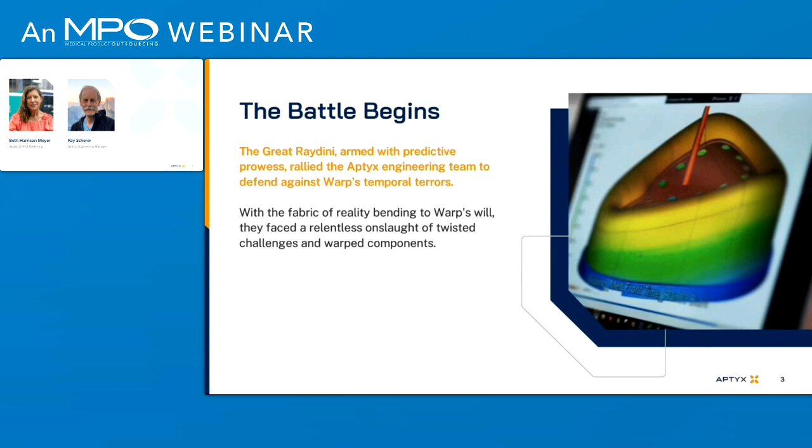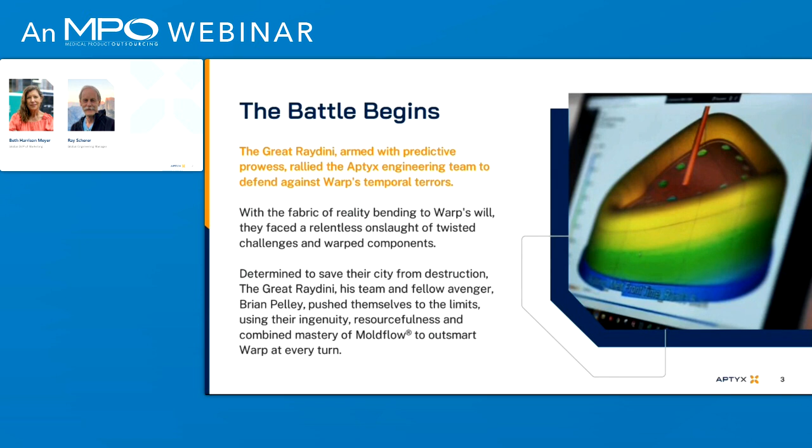In the bustling city of MedTechtropolis, where speed, quality, and life-saving innovation reigns, an Aptyx engineer named Ray Scherer discovered his extraordinary gift for predictive engineering. With an uncanny ability to foresee and course-correct using design for manufacturing, giving him an ability to dodge delays and evade catastrophic costs, he became known as the Great Raydini. As medical device and manufacturers faced surging demand for their groundbreaking products, a sinister force loomed on the horizon. Warp, a rogue villain with the power to manipulate time and space itself, emerged from the shadows. Driven by a thirst for chaos and destruction, Warp sought to disrupt manufacturing operations and plunge profits into darkness. The Great Raydini, armed with predictive prowess, rallied the Aptyx engineering team to defend against Warp's temporal terrors. With the fabric of reality bending to Warp's will, they faced a relentless onslaught of twisted challenges and warped components. Determined to save their city from destruction, the Great Raydini, his team, and fellow Avenger Brian Pelley pushed themselves to the limits, using their ingenuity, resourcefulness, and combined mastery of Moldflow to outsmart Warp at every turn. After a grueling battle, the Great Raydini, Brian, and their team emerged victorious, banishing Warp back to the depths of the time-space continuum. With MedTechtropolis safe once more, the Great Raydini's legend grew even stronger, inspiring engineers everywhere to harness the power of technology for good.

So I hope you enjoyed that video. We love what we do, and we like to have some fun with it. So what we're going to cover today is I will do a brief intro into Aptyx and then turn it over to Ray for the heart of the presentation, or rather the Great Raydini. He will cover tolerance planning and the impact of shrink and shape control and how to manipulate warp. And then, as Sean said, Q&A at the end.

So while Aptyx is a new or newish name, our experience is not new. As Sean mentioned, we bring together the aptitude and excellence of more than a dozen companies with a 70-year track record in complex design and manufacturing. We do this across a global network of more than 10 locations with a broad range of capabilities. But what makes Aptyx Aptyx is our team of experts, and our make-it-happen mindset. We like to say that engineering is the heartbeat of the company. Our team loves nothing more than diving in, partnering with customers, and solving complex challenges. And you'll see some of that today.

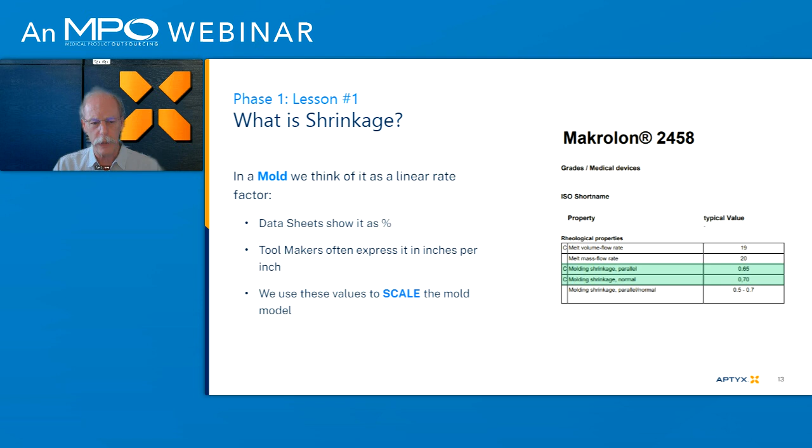Tool makers often express it in inches per inch. They could say 6/1000ths per inch, but it's really a scale factor of 0.6%. And that's what they'll scale up in their mold if they're doing polycarb, for instance, to build the tool, in hopes that when it shrinks, it'll hit size. All of those values we'll use to scale the mold, as I mentioned.

So now there's another way to express shrink that I want to bring up. As I mentioned earlier, if you're familiar with Moldflow, we use it a lot. Moldflow expresses shrink a little differently, and this is a key to what we'll talk about today. Moldflow expresses volumetric shrinkage, and it's basically the difference between melt temperature volume and solidified volume.

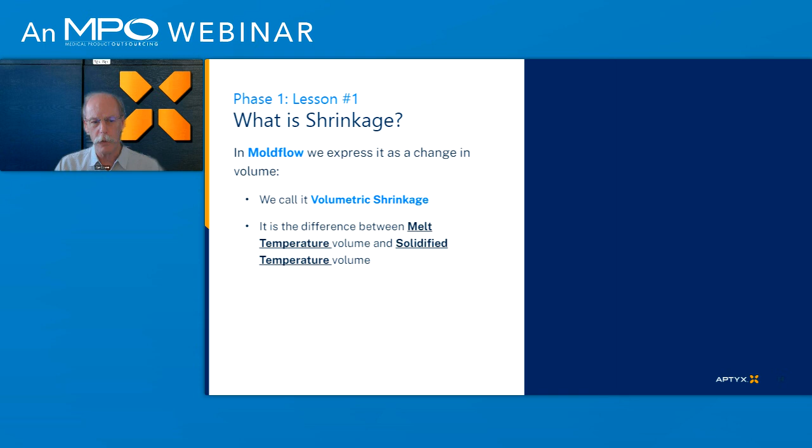So if you think about it a minute, when you heat up a plastic, it expands, density drops. When it cools down, it contracts and becomes more dense. That delta between the melt temperature and the solidified volume is really what Moldflow calls volumetric shrinkage. And here's a little pictorial example on the panel on the right. You can see the little white cube represents the melt volume where it expands. And then as it cools down, the little purple box is the solidified volume afterwards. And that percentage change in that overall volume is what Moldflow will report.

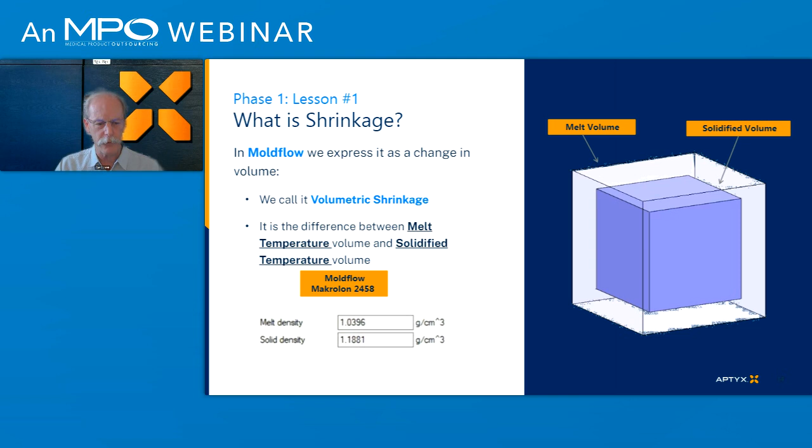If you look down on the left side, down the lower pane there where I have the Moldflow Makrolon 2458, you'll see the densities. This is out of Moldflow. The normal solid density for polycarb is 1.18, but when you heat it up, you lose the density, 1.03. And there lie some of the challenges that we have in plastics. Important note to make here is that volumetric shrinkage is not the same as linear shrinkage, although they're proportionally related.

So if you look over here again on the right-hand panel, this is a clipping out of Moldflow for some shrink study work that was done with Makrolon 2458, a polycarbonate. And you can see in green where I've highlighted that row, it shows a couple of different rates, the parallel shrinkage and the perpendicular shrinkage, which is cross flow. And again, we'll talk about that a little bit more later in the presentation.

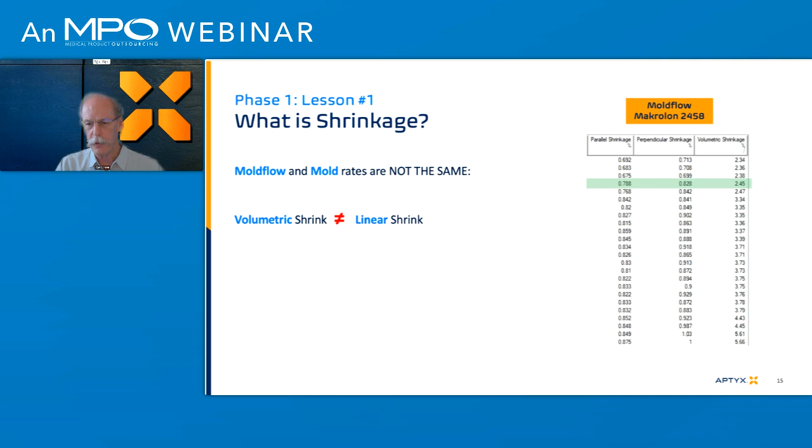But you can see 0.7%, 0.8%. But then you look on the far right, we got volumetric shrinkage at 2.45%. That's how much volume we would reduce. So while they're related, they are different numbers. It's important to point out.

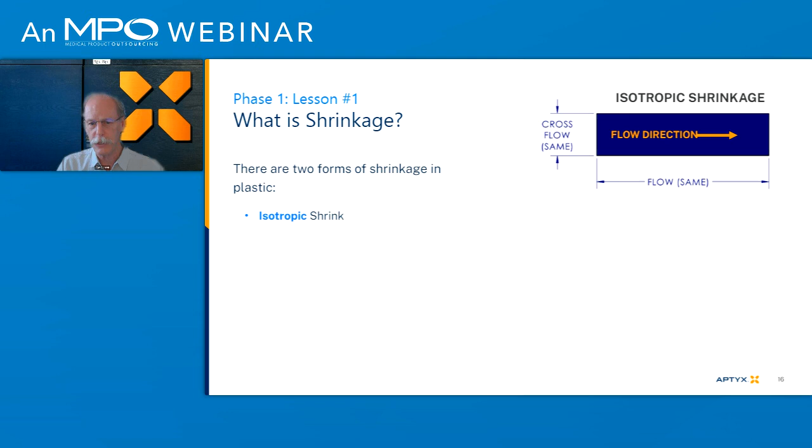There's a couple of forms of shrinkage that we need to address. One of them is isotropic shrink, and many of you might be familiar with that, but really it's just a fancy way of saying that the shrink in the flow direction and the cross flow direction is very uniform, virtually the same, and we'll call that isotropic. In contrast, there's anisotropic, which is different in the two different directions.

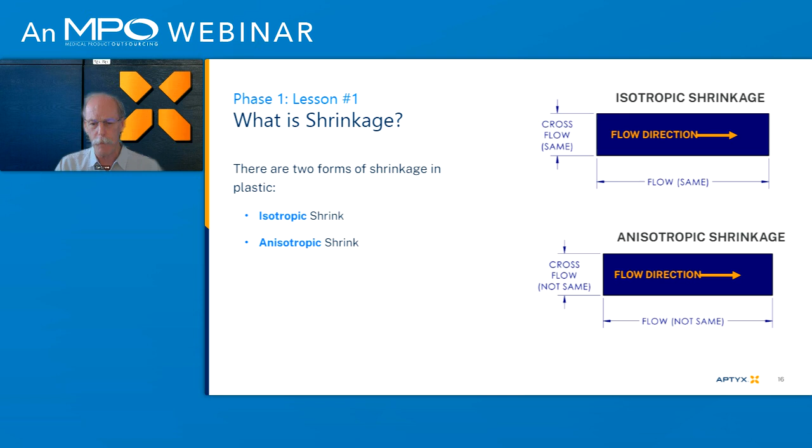So in the bottom image I just put up there, you'll see the flow direction. But in that flow direction, the shrink rate will not be the same as the shrink rate across the flow. And therein lie issues that will create warp. And what we can do to battle that is what we'll talk about a little later in the presentation.

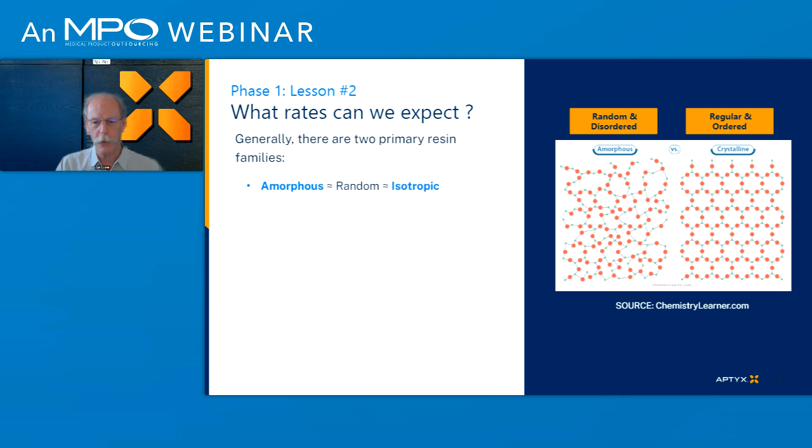So another important thing for everybody to keep in mind when they're picking resins is that there's two primary families, and many of you might be aware of this already. There's the amorphous family of resins, and in their molecular alignment, they're very random in nature, random and disordered, you can kind of see the panel on the right, and they're very isotropic. So because it's so random, you get a fairly uniform shrink with amorphous resins in both the flow and the cross flow.

In contrast, you got semi-crystalline resins, which are very regular and ordered inside the part. And that order causes deltas in shrink between cross flow and flow, which we'll call anisotropic. So good thing to remember, because as you get into designing parts, depending on what you're trying to achieve, one of these families might be better than the other.

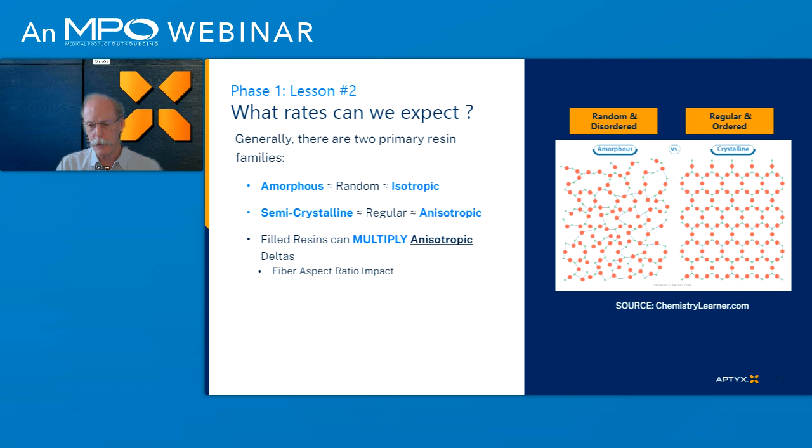A further complication, which we won't get into today, is filled resins. So the moment you introduce fiber into these resins, the anisotropic behavior gets worse. And it really has to do with that fiber aspect ratio, how long the fiber is compared to its diameter. I like to think of it this way. This is a picture in my head.

You can picture it as logs in a river. The river is flowing just like plastic flows. Those logs, which represent glass fibers in this particular case, could stack up on each other. So end to end, they can get very close together. But across them, there's plastic in between, or water, as we see here.

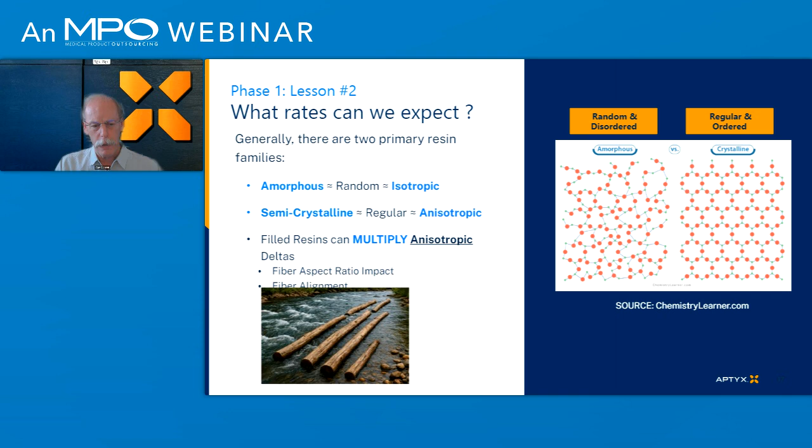So as that polymer begins to cool, the shrink across the logs actually gets higher than the shrink along the length, because the logs are holding it back from shrinking. And so you end up with a much lower shrink rate in the flow direction, and then a much higher one in the cross flow direction. But again, today we'll focus more on unfilled resins.

So a good question is what kind of rates can we expect? Generally speaking, amorphous resins will shrink about 0.4 to 0.8%, pretty common. In the chart on the right there, I just threw out some common amorphous resins. You got polycarb, ABS, polystyrene. You got the Ultems, the PMMA, the acrylics, PS, the polysulfones. Those are all amorphous resins, and they all tend to fall in this 0.4 to 0.8, or if you're talking to a tool maker, 4 to 8 thousandths per inch.

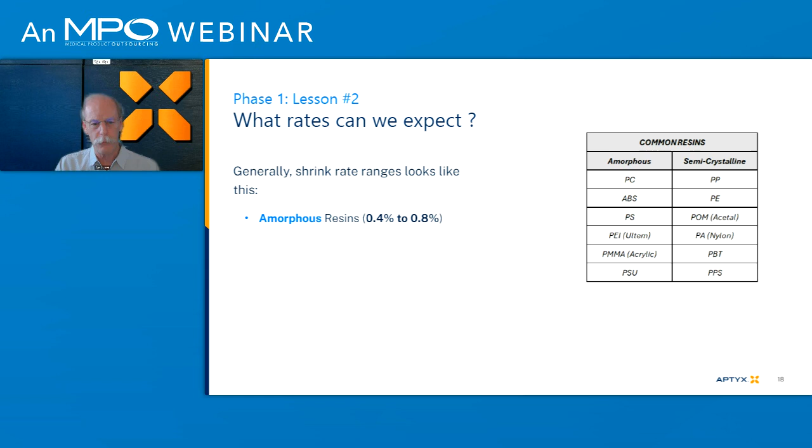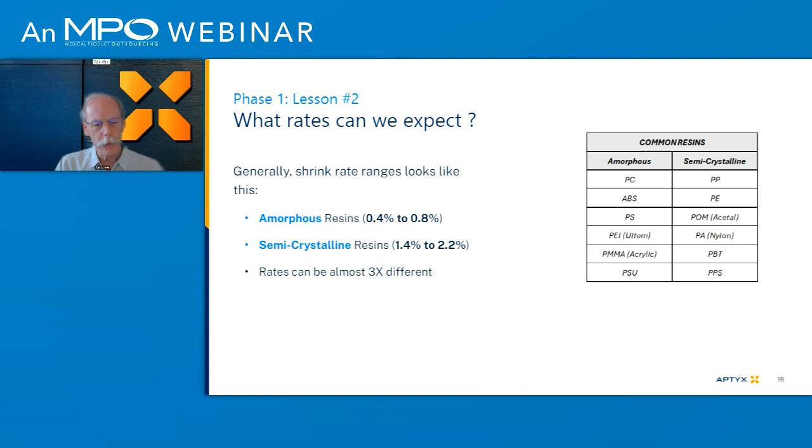In contrast, when you go to the semi-crystalline resins, it cranks it up quite a bit. You'll commonly see 1.4 to 2.2%. Those are resins that you see over the chart. Typical ones are polypro, polyethylene, acetals, your nylons, PBT, PPS. Those are all semi-crystalline resins that hover around these higher shrink rates. So if you notice, these rates can be up to 3 times different, which is important for the conversation today.

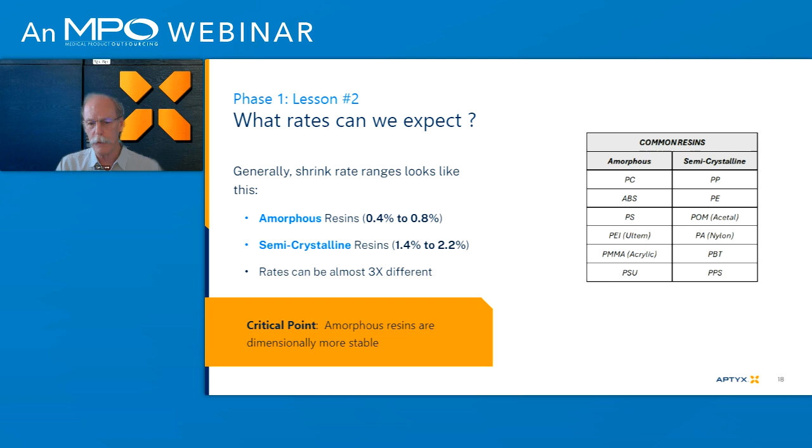So the take-home point is amorphous resins are dimensionally more stable, something to keep in mind. There's other reasons for picking different resins, chemical resistance and so on, but generally from a dimensional standpoint, amorphous resins are going to deliver a more dimensionally sound part. Shrink can vary for many reasons. This is what we want to talk about today.

Part thickness, and I'm sure many of you are aware of that. Part thickness, as it increases, so if you have a 60 thou wall versus a 150 thou wall, that wall thickness will have influence on shrink. As it gets thicker, you will get more shrink out of that wall. Pressure also has an effect. As pressure goes up, you can pack out the density harder, and you're going to shrink less.

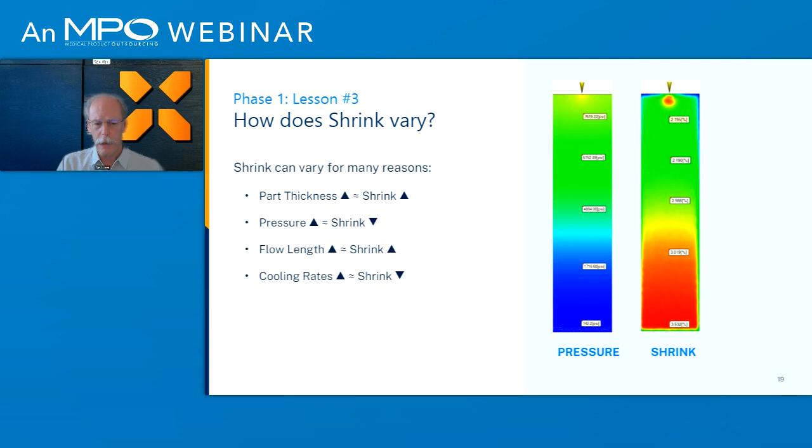And here's another really important one. Cooling rates can affect shrink. So the faster you can cool an area, the less shrink you might see out of that particular area. And we'll talk about that. So the important take-home point is volumetric shrinkage varies throughout a part, and that's on every part everywhere. Even though you design with a uniform wall, you can end up with variable shrink throughout the part for these other reasons: thickness, pressure, flow length.

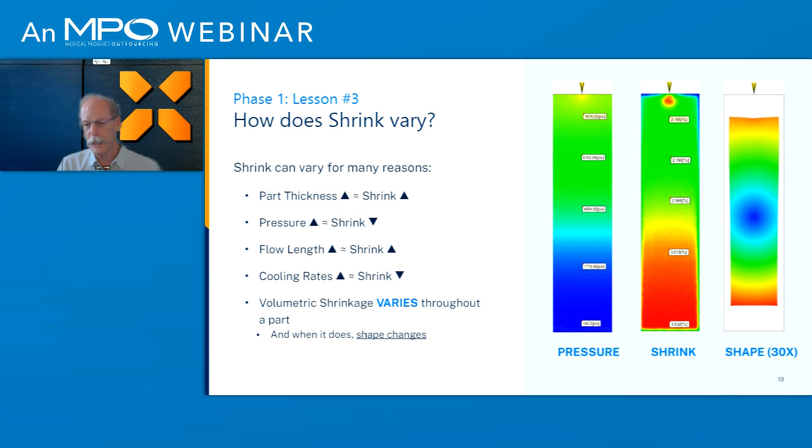So when they do vary, shape will vary. So this is where the struggle becomes. You know, you got your nice CAD file, you want your part to look like the CAD file, but you pull it out of the mold and now it doesn't. So here's a little magnified shrink or warp picture of these two plaques on the left. This is multiplied 30 times, but you can see the effects. It's sort of trapezoidal in nature. It gets narrower towards the bottom, it's larger towards the top. And that's the principle behind it.

So the question is, how can we manage risk? Well, there's some ways. One we've talked about, start with an appropriate resin. So if you've got very sensitive tolerances, tight tolerances that you need to drive, consider amorphous resins over semi-crystalline, good place to start. And be real about your tolerances.

It's so easy to take a model as a designer and bring it into a drawing and just tolerance everything at ±1. And the truth is, if it came out that way, your part would work just fine. The reality of it is it puts handcuffs on the manufacturing side, because you will get variation happening. So one way to accelerate speed to market as a designer is just to be real about your tolerances and really put numbers on there that make sense.

Use sound reasoning, tolerance stacks, whatever you need to arrive at your numbers, but always start large and work towards tight. Don't start with tight and work towards large. That'd be my suggestion. But whatever you end up with, there's a way for you as a designer to gauge how much risk you've put into your design. And this is what I want to show you.

So the question is how tight is too tight when I put a tolerance on a dimension? So this is a little equation I want to teach you. If you take the one-sided tolerance of a dimension, so for instance, plus or minus 10, if you take the 10 and divide it by the feature nominal, you'll get a number. And that resultant value indicates how much shrink error your tolerance can accept. And I'll explain that more.

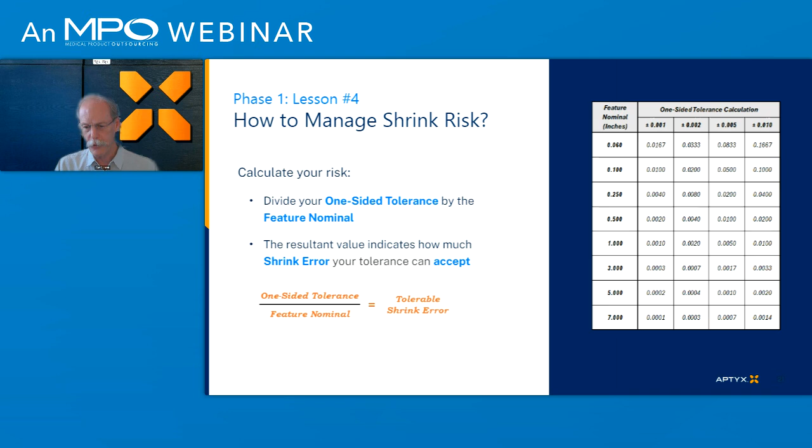In contrast, if you look at the 1-inch dimension, if I take the 1,000th divided by 1, I only got 1,000th of room. So if I miss my shrink rate by 1,000th, I'm going to be out of print on this. So let me show you how this plays out. What I typically do to get a handle on it is I'll look up the shrink rate for the resin. So let's say it's polycarbonate, and I just use a margin of about 25%. And I say, okay, I'm pretty confident that this whole part is going to be within plus or minus 25% of nominal shrink rate. So I'll do a calculation.

I'll call it my error interval. So I'll take the 6,000th shrink rate multiplied by 25%, and I'll say I'm 99% confident that that whole part is probably going to be within plus or minus 1.5 of my 6, with all that variation we talked about. So it's really saying my confidence range is a shrink rate of 4.5 to 7.5. So you say, well, what do you do with that?

Well, if you do your shrink error, the calculation I just showed you, if your value is greater than the 1.5, you're at a low risk. That means your error available to you is much higher than the shrink, and you are in the interval of error that we're expecting, and you're low risk. In contrast, if you do the calculation and your error value is lower than 1.5, you're at high risk.

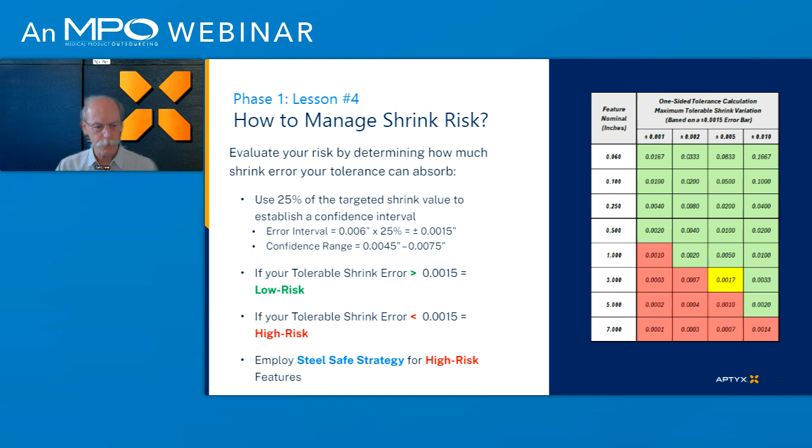Here's a little chart on the right. The red is all high risk, based on a 1.5 thousandths error bar for polycarb. You can see all the reds are below 1.5. Those are dimensions I wouldn't expect to hit out of the gate, or that could be at high risk. Typically what I'd do is look at a steel safe strategy around those. If they're in the green, you're pretty safe. If you're in the yellow, you need to look at that and make a decision. So this is a method we employ to determine what dimensions could be at risk, and then try to employ a steel safe strategy.

So what we do is I have a little tool, a spreadsheet we put together that automatically calculates like this. We'll take a customer's drawing, populate it with all the numbers, and put an error bar in up here on the upper right. We put the expected shrink rate and the error bar in there, and it flags which ones could be a concern. We take a look at those and decide how we want to approach it. It's a good little tool for you guys to use if you're a designer, to get some idea of how much risk you're putting into it via tolerance.

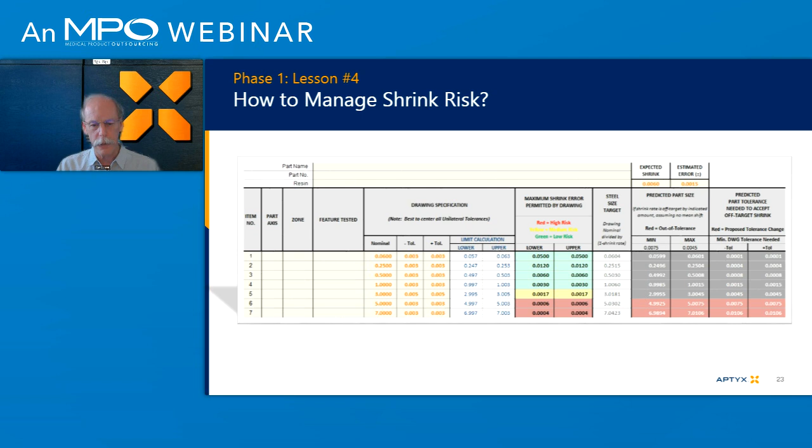A lot of times these tolerances are real, and that's where you need to be. Then you just have to work with the molder to come up with a plan to groom the mold into those tolerances.

Okay, shape control. Here's where we're going to take these principles and apply them to shape, which is really the center of the discussion today. The question is, can I use the shrink to my advantage? And the answer is absolutely. You can use it to manipulate warp. It took me a long time in my career to really realize this. I knew if I could predict it, then there was something going on there that I could possibly control. That was big for me when I finally saw this play out.

Let me go over some really basic principles that feed into this discussion. On the shrink side, we know from our earlier discussion that resin within a part does not shrink uniformly, and that's the case with all parts. So going into it, one rate's not going to solve it all.

Principle number 2 is important: if your volumetric shrinkage patterns are balanced about a neutral plane passing through the center of mass, a part will not warp. Let me explain. We talked about volumetric shrinkage varying all the way through a part. If that variation is distributed in a way that's very balanced about a plane—if you look at this image, I drew a cross section and a line through it indicating a neutral axis or neutral plane in this one axis—if you've got equivalent shrinkage on both sides, the tug of war will balance out and the part will be flat. If you don't, then the part will warp.

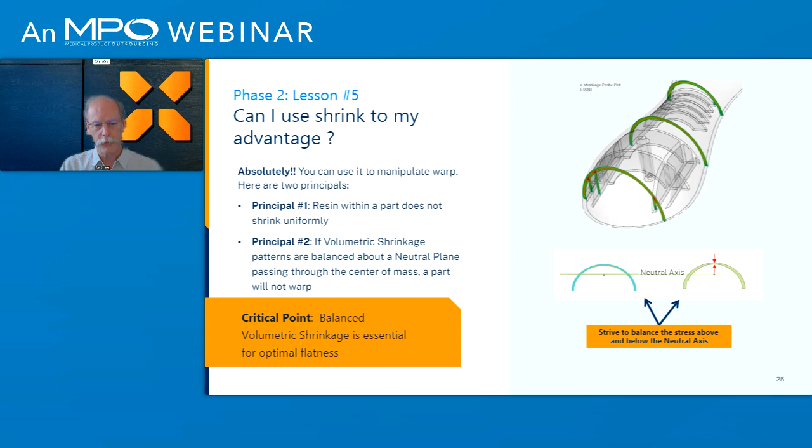The important point here is that you need to strive for balanced volumetric shrinkage if you want to achieve optimal flatness. Not every part has an optimal flatness requirement, but a lot of them do. And this is where, if you understand this principle, you can apply it and actually attack that.

This third principle I want to bring up is probably the biggest eye-opener for me. I would say if you go away today not remembering anything else I went over, if you could remember this one point, it'll be huge for you—huge. And that is: shrink decreases along edges.

So that's that distance from gate phenomena we talked about. It's that pressure drop phenomena. So we're actually shrinking a whole lot more at the end of fill than we are close to the gate.

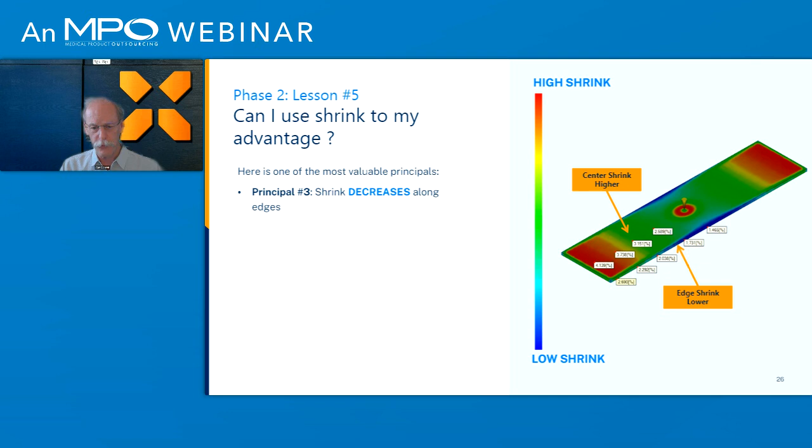And this is the part that I didn't understand for the longest time. But it's one of the major drivers of warp. So again, if you remember nothing else, remember this picture in your head that shrink decreases along edges.

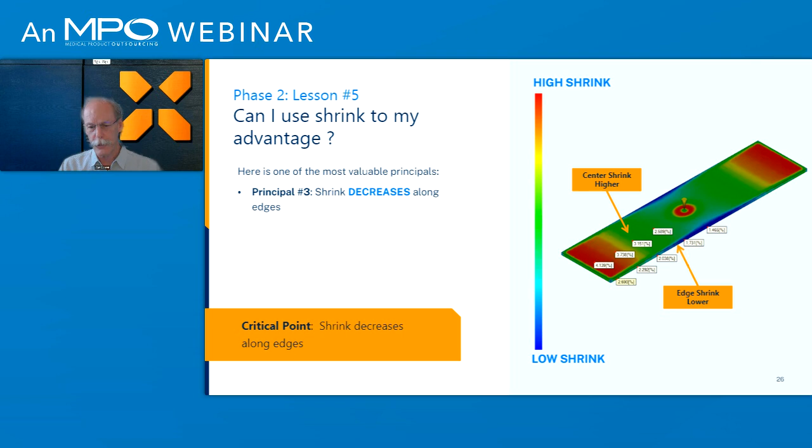So I want to show you how it played out. What we have here is volumetric shrinkage over some varying lengths here. So this is this simple little part. It's a plate with a couple of ribs. You can kind of see the picture.

First note I want to make here is that the part surfaces with higher shrinkage may be shorter than planned. So if you look at this legend again, you could see that blue is low shrink, red is high shrink. And we have anywhere we have multiple colors kind of going through this. You can see the green. So anywhere where you see a green, it's going to be a higher shrinkage. The part is going to proportionally shrink more than in the blue regions.

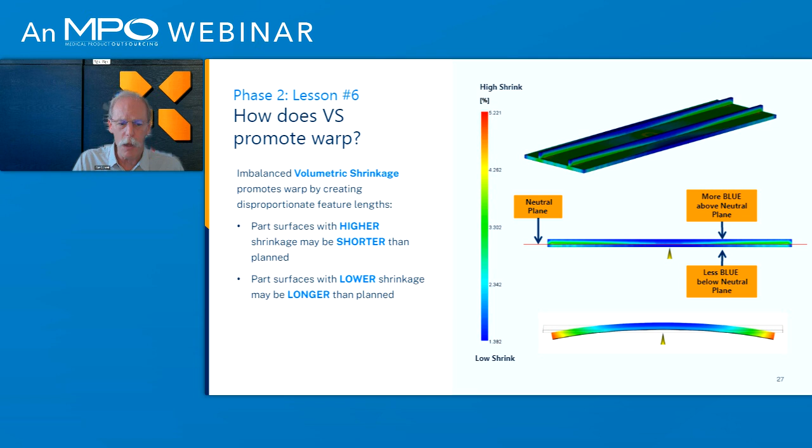So the opposite is true. The lower shrinkage occurs, it becomes longer. So anywhere you see the blue, you're going to be proportionally longer when you come out of the mold. So your mold is proportionally cut, but when that part comes out, you're going to have a long length of blue and a short length of green, and it's going to cause some distortion.

So if you look down to the middle view, I tossed in a neutral plane, that red line, you can see it. And if you look north and south of that line, you start to get a little bit of a picture. You look to the north, you see a lot of blue in those ribs, especially concentrated in the center. When you go to the south, there is some blue, but it's only along the edges. So we have this imbalance.

You can kind of see it better in the perspective view up top. You have a lot of blue up top. So something's going to happen because all that blue wants to go long, all that green wants to go short. And the picture down below, which is magnified, I think it's 10x, visually, you can see what happens. It curves. The top surface that's blue goes long, the green goes short, and that part turns into a cylinder and bends. And once I realized that, I figured, okay, now I think I got a way to attack this and maybe fix it. And that's what we want to show you here.

So again, every part contains elements of both of these shrinkages, and you can see it clearly in this particular slide.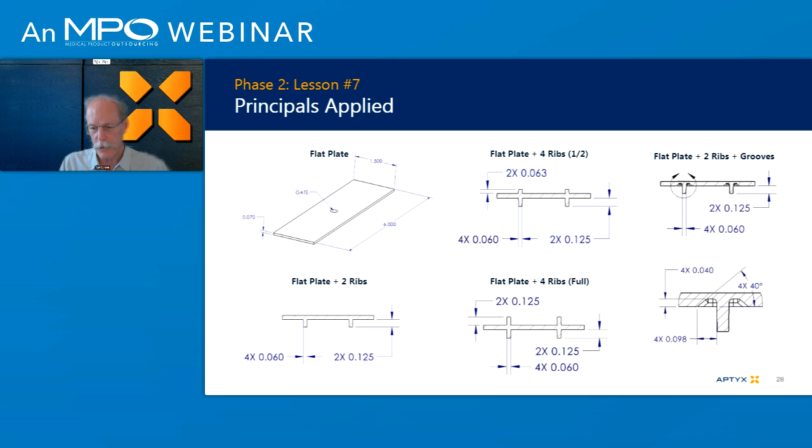So here's our flat plate, and this is a cross section of volumetric shrink. You can see in the middle, it's highly green. Around the edges, it's blue, very uniform all the way around. So if you drew a plane through the middle of that, you can see that's fairly uniform volumetric shrink, and you might expect it to be flat.

And here it is. You can see the ghost lines where the part started, it shrunk back, and we're basically very flat still, no issue.

We go to the next one, which is the one we've already seen, with the two ribs down below. But you can see through the cross section that we got a lot more blue to the south on top of those ribs, but very little to the north side. So what does that do? In this case, it creates a smiley face. It's just inverted or flipped around from the previous slide that we looked at.

So now let's make some changes. We'll take this flat plate and add those two little short height ribs to the north. They're half the height of the ones on the underside. If you look at the cross section, you'll see there's still more blue to the south than there is to the top, but there's still more to the top than there was before. So maybe this should help.

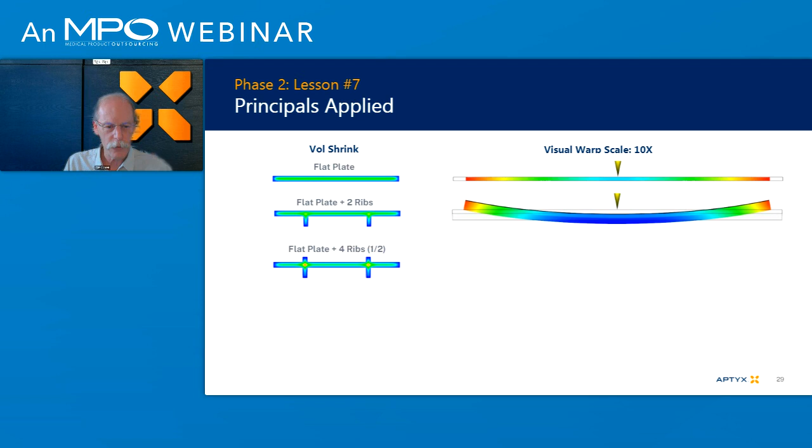Let's find out. And sure enough, it does. If you look at the shape, it's still smiling at us, but it's not quite as much as it was previously. So the question is, what if we make those ribs full height, so we're completely symmetrical?

If you look at the cross section again, you'll see the blues all pretty much match up symmetrically. And what might we expect? It'll stay flat. So it'll shrink, but it'll stay nice and flat.

Lastly, the groove idea. So we threw some grooves in. We still have all the blue that we'll have down at the bottom of the rib. But now we've introduced a couple of bands of blue at the base of the rib just by virtue of these little slots that we're running down. So let's see if that balance can help us.

Let me click ahead here. And there you go. So again, at 10 to 1, what's going on here? At 10 to 1, it's very, very flat. And you see a little bit of a smile. So it didn't completely get it out, but it got it a whole lot flatter than it did.

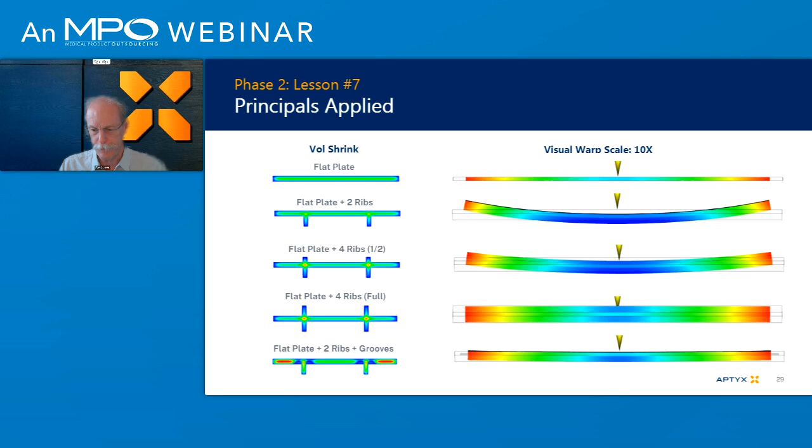This next one I want to show you is employing these concepts on something a little more complex in geometry. This is a laparoscopic handle. It's a very curved one, and as a designer, we would normally design these things with an 80 thou, uniform wall, and that's how this one was designed.

It's a 2mm wall, very uniform. If you look at the pictures on the right, again, this is volumetric shrinkage. You can see the legend across the top, blue to red. If you look at the outside of the part, I put some examine points there. You can see it's ranging in the 4% range across the top of the part, volumetrically. Along the ribs, you're at 5%.

If you flip it over and start to take a look, you can still click on the main walls and see the 4% along the center, but along the edges, you're in the 2s. So here's that edge principle we were talking about, that's shrinking less than the center. So that long length is going to have to go somewhere, and that center is going to have to shrink more. So it kind of gives you a hint which way this is going to go.

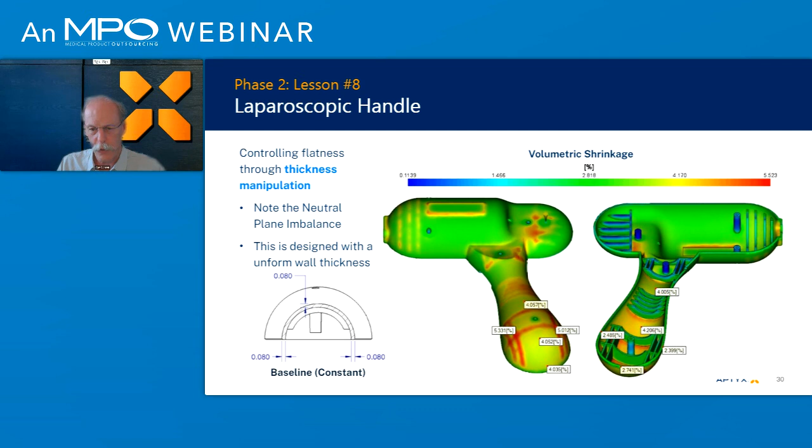For this particular example, all we did was focus on the handle. We didn't do anything with the head of the part. So let me see what that looks like. At 10 to 1, there's your smiley face. So it took the part, and as predicted, it warped upward, gave us a smile.

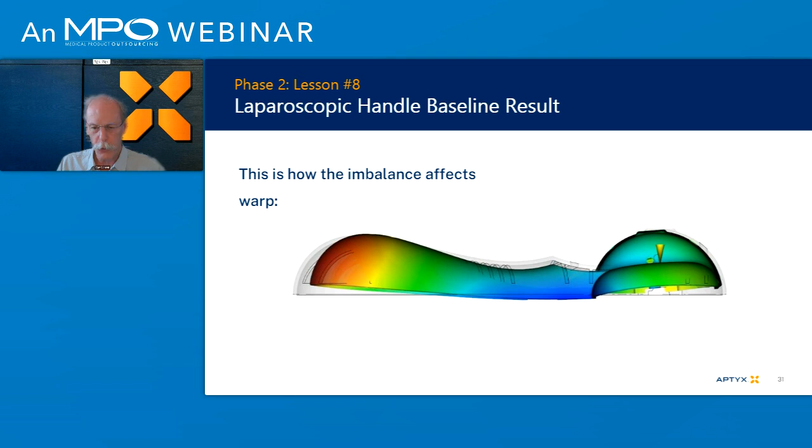So the question is, what can you do about something complex like this? I don't want to put ribs to the outside. Can't do that.

So here's a little trick I learned that is very effective, especially for clamshell handles. We took this handle, and in that blue area, we decided to do some modification.

The question is, we're starting off at 80 thousandths. What if we slowly thin it down? Let's do a very extreme case - I went all the way down to 45 thousandths at the top. Now that's getting thin, probably too thin than you'd ever want, but for illustration purposes, we went there. So we went from thick to thin in the middle, back to thick again at the edge.

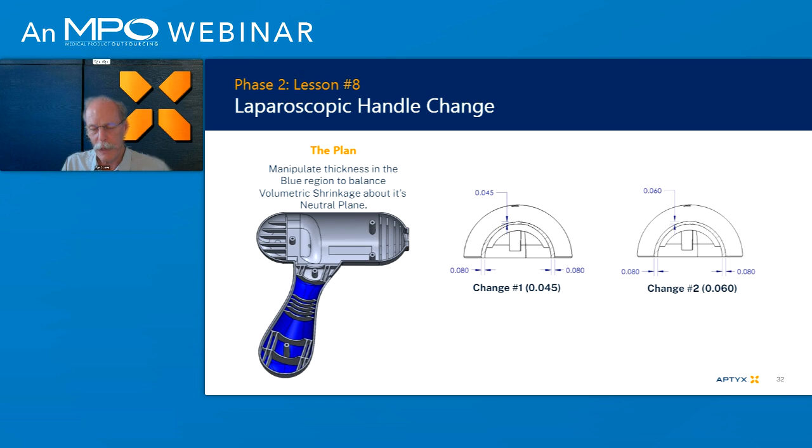In contrast, change number 2, we did a little less. We still started with the 80 thousandths and then tapered it down to about 60, a little less - that's something probably more reasonable. Let's see what this does to our shape.

This is the baseline we talked about earlier, just looking at shrinkage at the top - there's all your 4s and 5s. The next one is where we thinned it down to 45 thousandths. Look what happens - that top band where we're getting thin changes drastically. We went from 4s all the way down into 1%. So something's going to happen here.

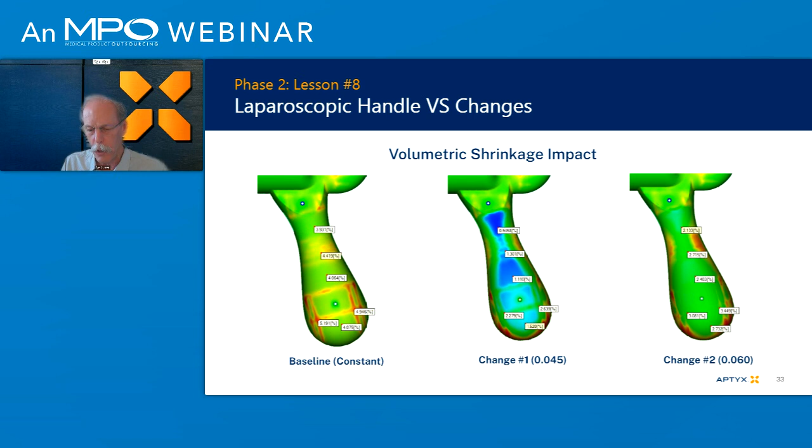On the next one, where we didn't go quite as deep, we still brought it down. We got into the 2% range, which, if you remember, is very close to the range we're seeing on the edge of the part. So now we're starting to get some balance. Let's see how these shapes look.

Again, the constant wall version, which you saw earlier, is this pretty aggressive smiling face. On our first change, we went down to 45. Look what happens - it actually flips the other way. I kind of call this the holy grail. When we hit this point, we're actually able to manipulate shape to tune our flatness. And this is huge because it's actually steel safe in a mold. And obviously you don't want to frown either, like it's showing.

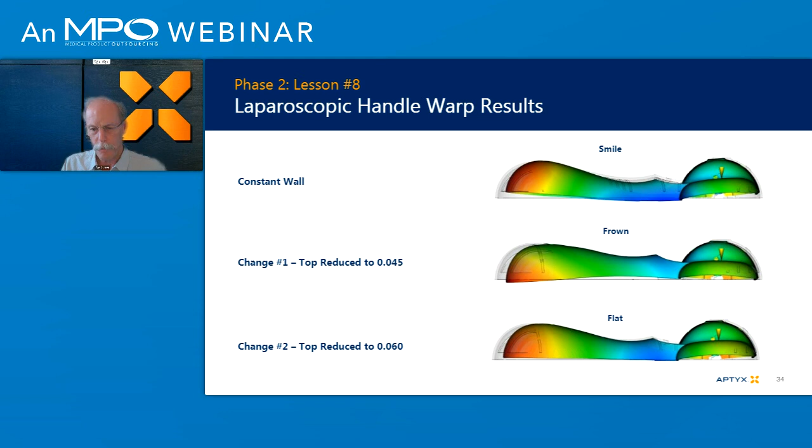Let's go to that 60 thou one and see what it looks like. It comes in fairly flat. Again, on the right, we haven't addressed any of that - we only worked on the left. You can see we're starting to approach flat. Now we could tune this more and try to get it really flat, but it is a technique - a great technique to employ when you're creating handles for any kind of laparoscopic handle or any kind of surgical device, to be able to control flatness.

So kind of just a quick summary here of what we learned. I know we went over things pretty quickly, not a lot of time, but let's just review. Amorphous resins are dimensionally more stable than semi-crystalline resins. That's very important for you guys to think about as you're picking resins - give that a lot of thought. It'll help you be victorious.

Linear shrink rates aren't the same as volumetric shrink rates. We talked about that - so just because a tool maker's putting 0.006 inch per inch shrinkage into your mold doesn't necessarily mean that's what you're going to see. Tolerance-related shrink risk can be identified using that simple calculation I showed you, so it's a good way for you to assess what you're up against. And then, of course, lastly, balancing the volumetric shrinkage about a neutral plane or neutral axis is essential for shape control. These are some important points you could incorporate when you're thinking about your designs and designing new products.